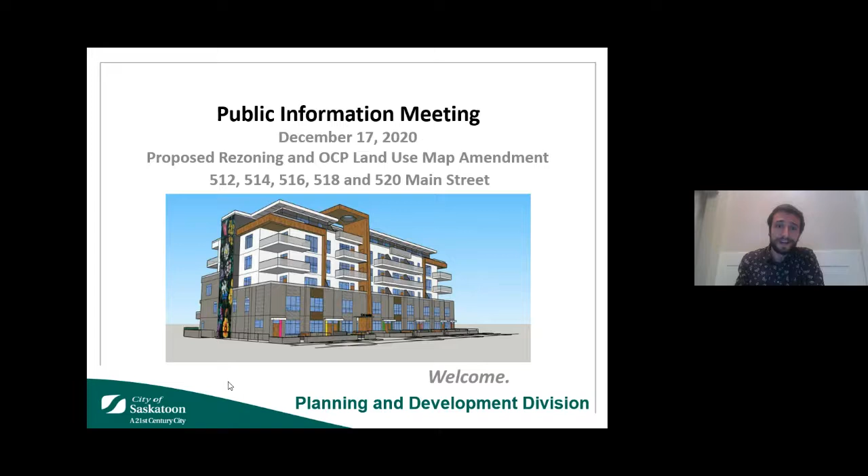Thank you, Councillor Block. Now, before continuing, I would like to briefly outline the structure of our meeting this evening. Firstly, we'll be hearing the presentation from the administration, outlining the proposed amendments and how these would function within existing policy. Following this, we'll have a presentation from the applicant, wherein they'll provide an outline of their proposed development.

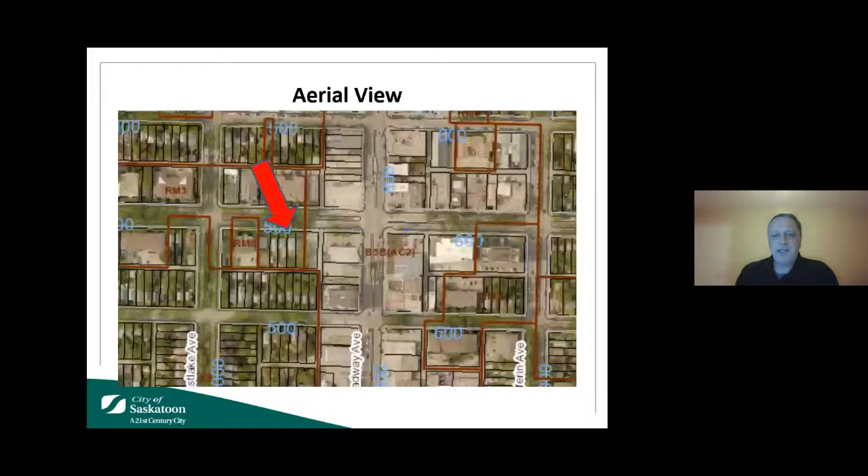The proposed rezoning to an RM5 district, subject to an agreement, will provide for development of a 6-story multiple unit dwelling on the site. The proposed development contains a mix of housing styles, including at-grade townhouses with entry onto the street, apartment-style condominiums, and a penthouse suite.

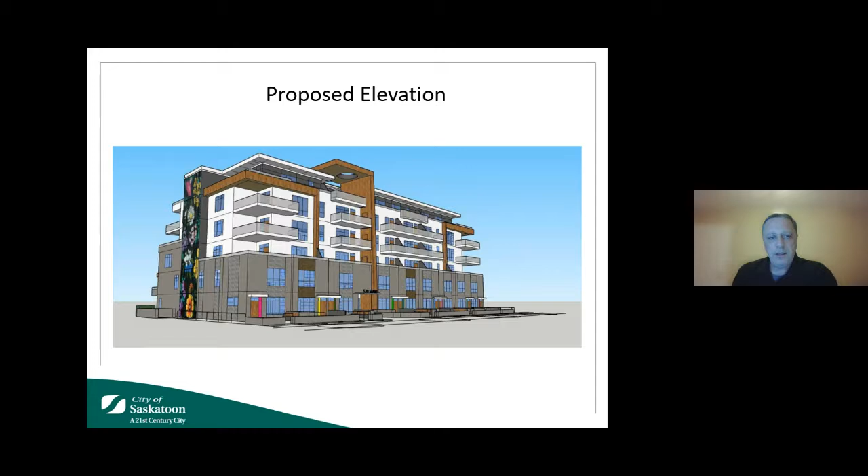The proposal provides 77 on-street or on-site parking spaces, in line with the zoning requirements for that district. 13 of those parking spaces are just off the lane, and 64 are in an enclosed structure, some at grade in garages and others in an underground parkade.

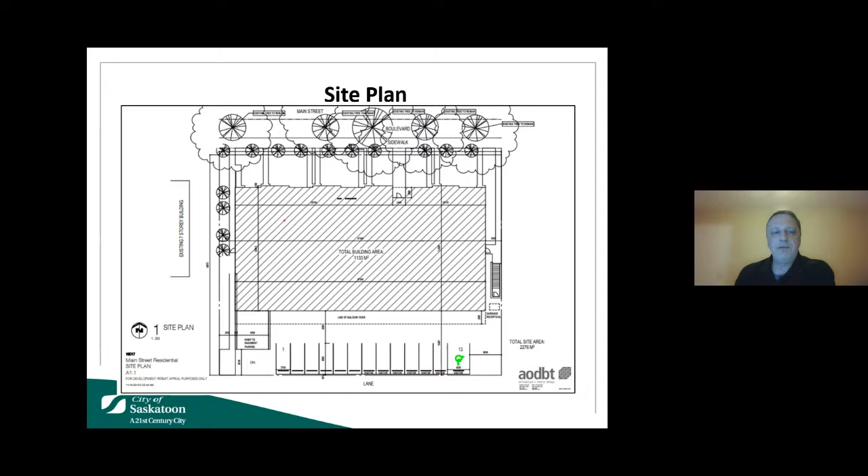There are existing boulevard trees adjacent to these properties, and the applicant will be working with the city's urban forestry group on a tree protection plan for these trees. The applicant will talk more about the building design and style in their presentation.

Now, in some instances, a regulatory tool called a zoning agreement may be used when a specific development is proposed as part of a rezoning application. A zoning agreement is a legal tool and agreement that, if approved by City Council, is tied to the land and ensures that only the specific development proposal put forward by the applicant can be constructed on that property.

So for this proposal, a zoning agreement would provide for the 6-story multiple unit dwelling. It would identify a maximum of 50 dwelling units and other site requirements, tying it to the layout and overall design you'll see tonight.

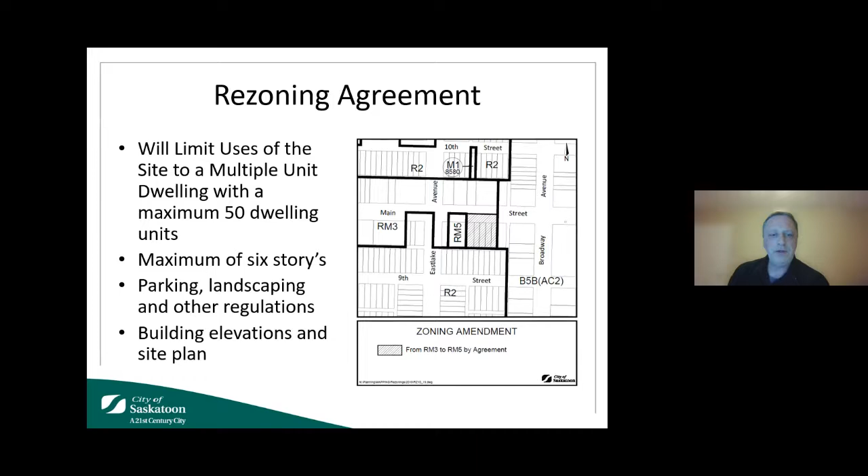To accommodate the proposed development, an amendment to the official community plan land use map will also be required to change the land use designation from medium density residential to high density residential. This high density residential designation would be the same as applied to the 7-story apartment immediately west of the site. The current land use designation and zoning would provide for a multiple unit dwelling about 3 to 4 stories in height, while the amendments would provide for the 6-story building.

Now, the intent of a high density residential land use designation is to enable the development of a range of residential building types and community uses.

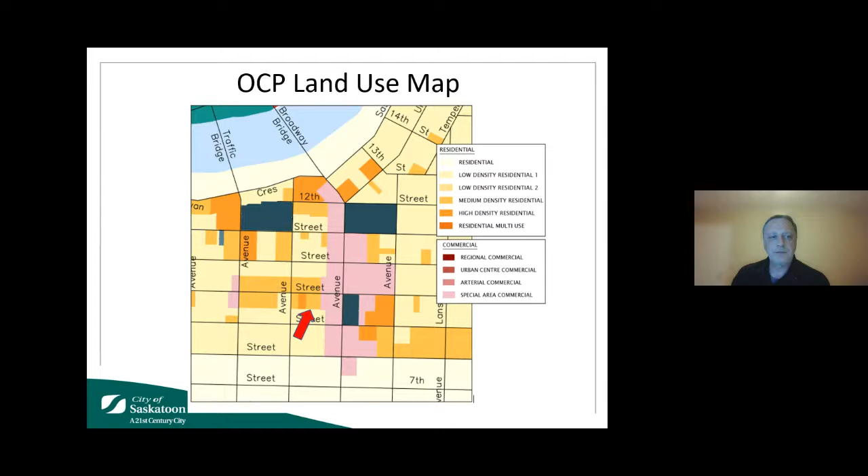There has been a local area plan done for Nutana, and in evaluating this proposal against that local area plan, there were components it did align with. It did protect and enhance housing options in the Broadway area by providing opportunities for various housing choices and for people to live in the area.

It did protect the human scale of development to promote the street orientation of commercial and residential development. You'll hear more detail about how the main floor units on this development enter right onto the street. And it reflects the historic residential character of the area by ensuring that street-oriented development.

There is also a Broadway 360 plan done for the area, which defines neighborhood character areas, including the Main Street corridor and higher density development. There was a resulting architectural overlay zoning district, but that was only applied to the commercial area of Broadway and does not include these properties.

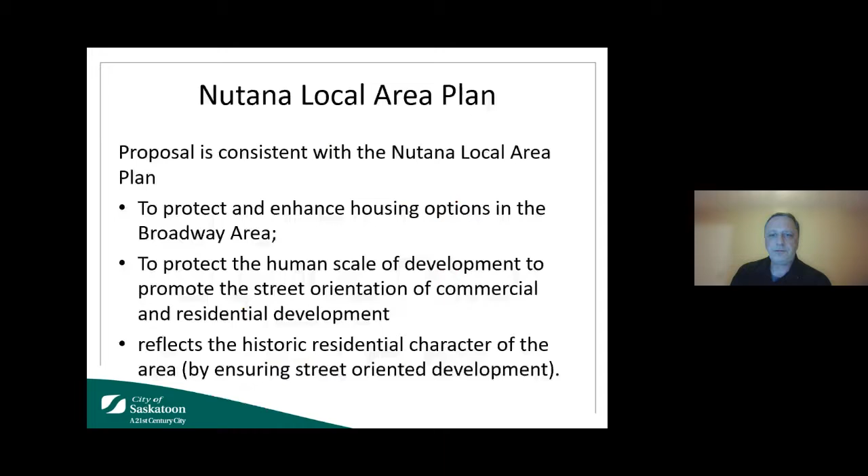For the next steps of this proposal, administration, after this public consultation is over, will evaluate the comments we hear. When we're ready to move forward, we will prepare a report to the Municipal Planning Commission, an advisory committee that will provide a recommendation on the proposal to City Council, along with administration's recommendation. Our administrative report will summarize comments from the public consultation and our technical review.

The earliest we would be able to take forward a report to the Municipal Planning Commission would be the end of January 2021.

Following Municipal Planning Commission, all applications need to be considered at a public hearing at City Council. Before that public hearing, we do place ads in the newspaper. At the public hearing, City Council will hear administration's report, consider Municipal Planning Commission's report, and hear from any members of the public that may wish to speak.

We will be updating our Engage page with those dates and to provide any timeframes for how the application will be moving forward. At this point, I'd like to turn the presentation over to Jason Hurd with AODBT to discuss further details of the proposal.

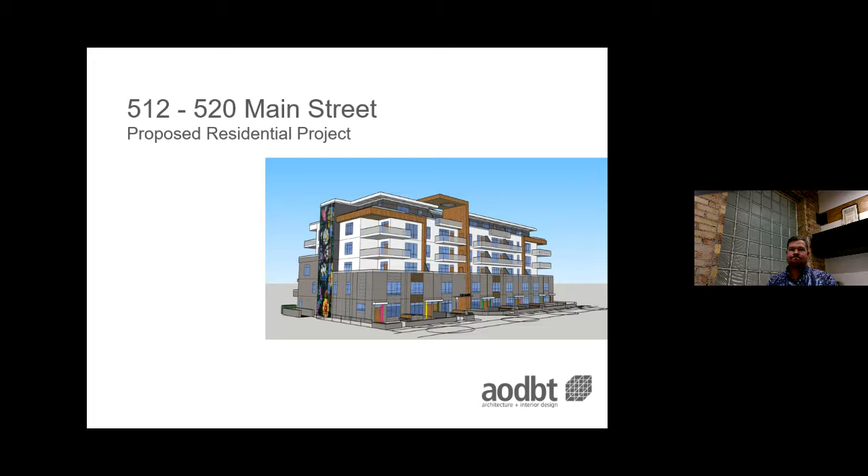Our clients, Connie and Brian Shank, have roots in Saskatoon, and because of that, they have an understanding of the special character of the Broadway neighborhood. They also have a real interest in working to enhance that neighborhood with this development. They really believe that a place with so many great amenities can only benefit from a project of this increased scale and size. Working with them, it was pretty clear.

Working with them, it was pretty clear that they had a real focus on creating a building that brought something special to the Broadway neighborhood, through a mix of different housing types contained in one building, which could cater to a number of different demographics: young professionals, working families, or even retirees looking to downsize but stay in the neighborhood.

This is the site plan. Daryl talked a little bit about this, but to reiterate, our parcel that we're developing is the hatched out portion in the center, which would represent the building. The site is bordered by Main Street along the north, Broadway to the farther east, a lane access to the immediate east, a rear lane to the south, and an existing 7-story building to the west.

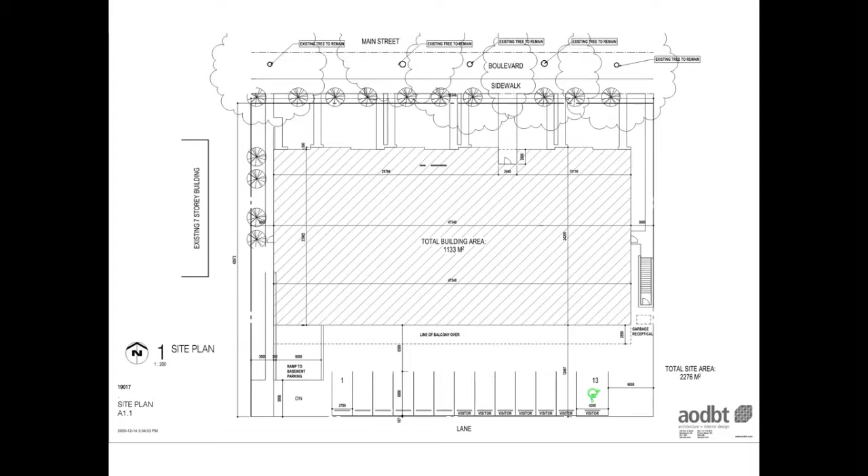Focusing a bit more on the site itself, one of the defining features is really the row of existing heritage elms along Main Street. They're really one of the most important assets of the Broadway neighborhood, and our team worked closely with urban forestry to prepare a design that would address that, providing minimal impact to those trees and maintaining them as an asset as the project was developed.

As mentioned, there is rear lane access, so that gave the project the opportunity to have a mixture of surface parking and underground parking access from the rear lane. The site plan also shows, along the north side, 2-story townhouses along the first couple levels of the project. The idea behind those was to address the street in a traditional way to help reinforce the residential character of Main Street, so you actually have traditional style front entrances and front yards along Main Street.

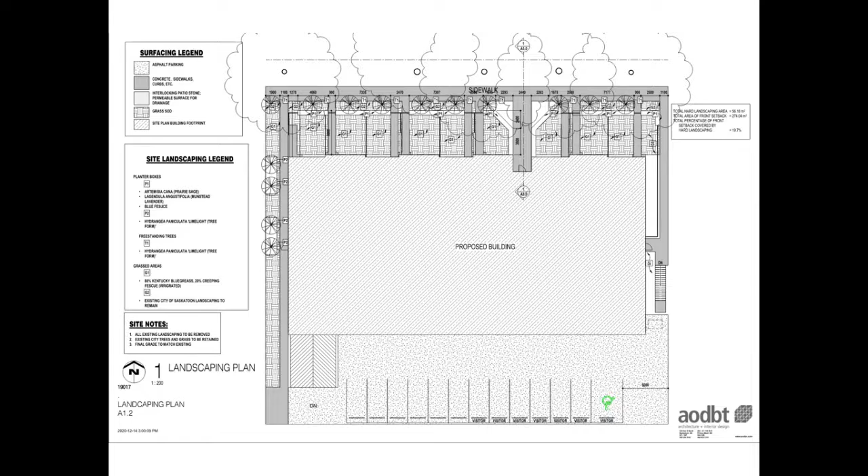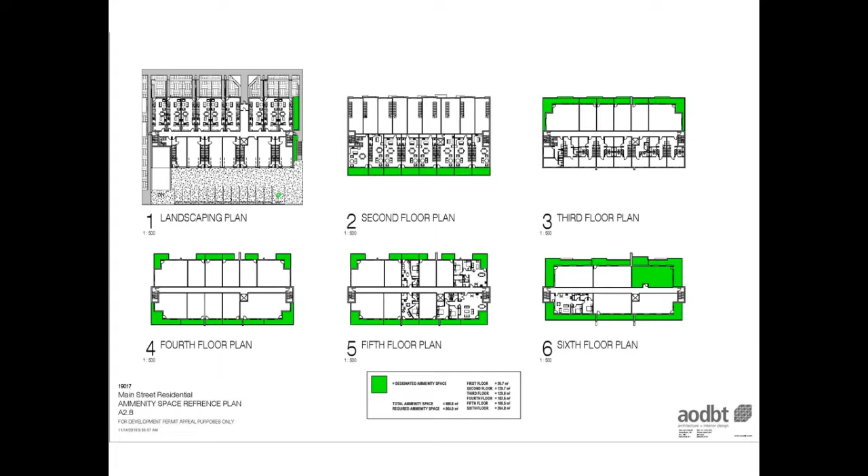The massing of the building was really designed to minimize the impact of shadows on the street. By virtue of the location of the site, which is on the south side of Main Street, there's an adjacent lane on the east side, a fairly wide boulevard along the north. Main Street's a 2-way street with a very large landscape median down the center. From our perspective, the shadow patterns will be very minimal and should have minimal effect on the neighbors.

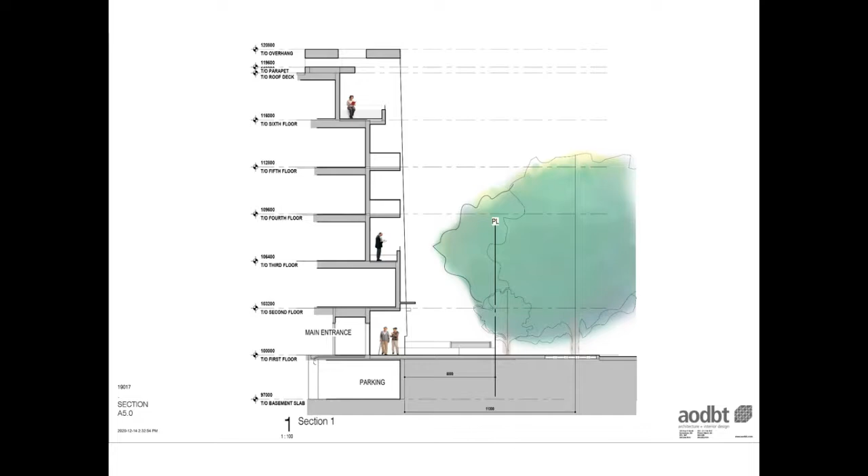We can have the next view. So the exterior design of the building is contemporary, but the townhouse units along the first 2 floors help reinforce that traditional scale and massing at the street level. You can see an indication of the front yards - a traditional front yard, front porch, front door along Main Street. The intent in terms of materials is really to use premium exterior finishes, which will ensure the quality and longevity of the building.

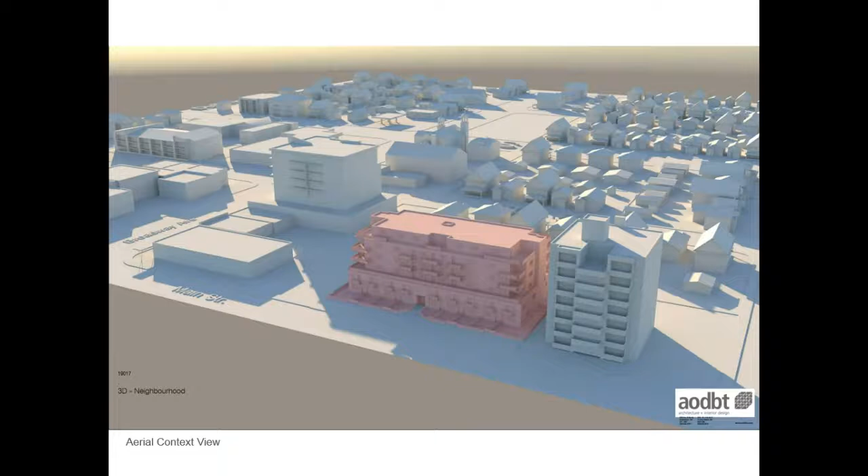I think that concludes my quick presentation on the design, but I'm happy to turn it back over to Tony for questions.

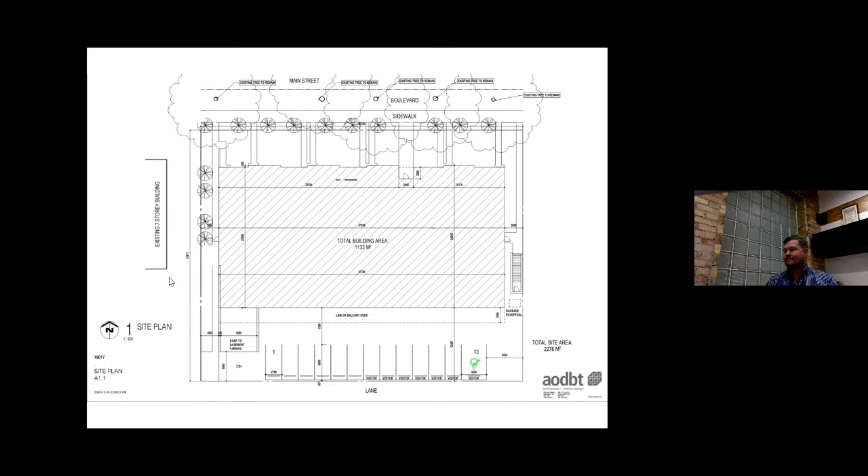Next question: just noting there are quite a few high population buildings in the area currently, either under construction or existing - including the Beto structure at the corner of Main and Broadway, which we've spoken to earlier, and the existing apartment to the west. Just some questions about what are the rules over density. Are there any development standards that regulate building density and residential density in this area? Perhaps I could get Daryl to speak to this question.

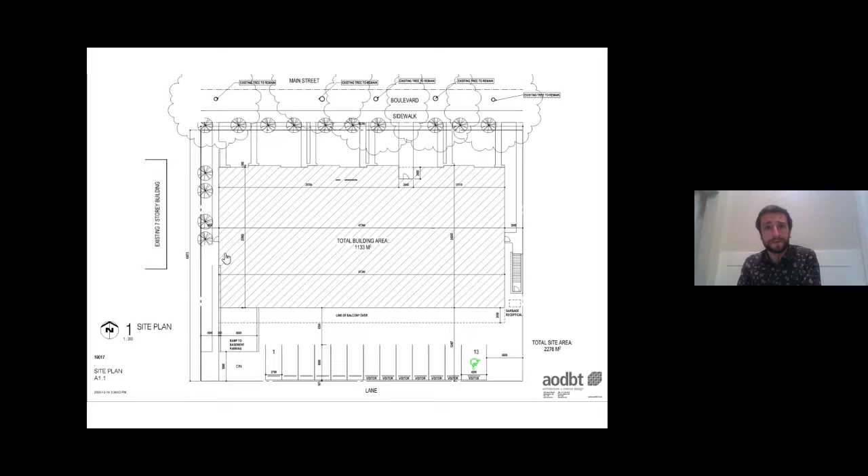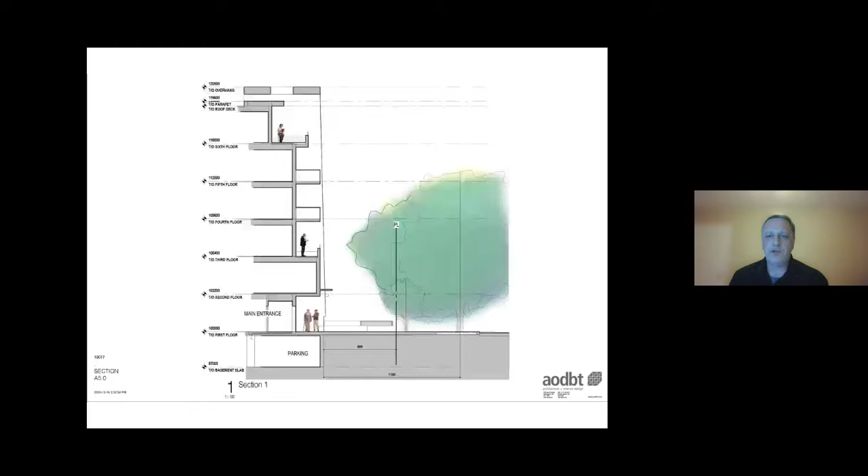All right, thank you Anthony. That's an excellent question about density within our city. There are guiding policies and documents we look to in our evaluation of how much density should be in certain areas of the city. One of the first aspects is the growth plan to 500,000 that was adopted by the city, which looks at promoting infill to ensure sustainable growth within Saskatoon. That growth plan looks at strategic growth nodes such as north downtown, university lands, but also along corridors and strategic infill opportunities. Our official community plan also describes where our density would go within our city. Looking more specifically at Broadway, the Broadway district itself provides for higher density development along that corridor or street. There are nodes that go out from Broadway, such as Main Street and other flanking streets, that do provide for some of that higher density.

So there are those policies that we do look at to ensure that development does fit the density for an area. There are other technical matters we also have to look at. We want to make sure that any development can be serviced appropriately. So part of our technical review for this proposal was to ensure that water and sewer can be provided on the site without impacting other properties. So I can advise that through our technical review, it can be met.

So that question about density, there's no cap prescribed, but what we look at is how that fits within our policies, both within the official community plan and larger policies like the growth plan. It's a great question. I hope I've answered it for you, and if you need to discuss that further, please make sure you reach out to us to discuss some more.

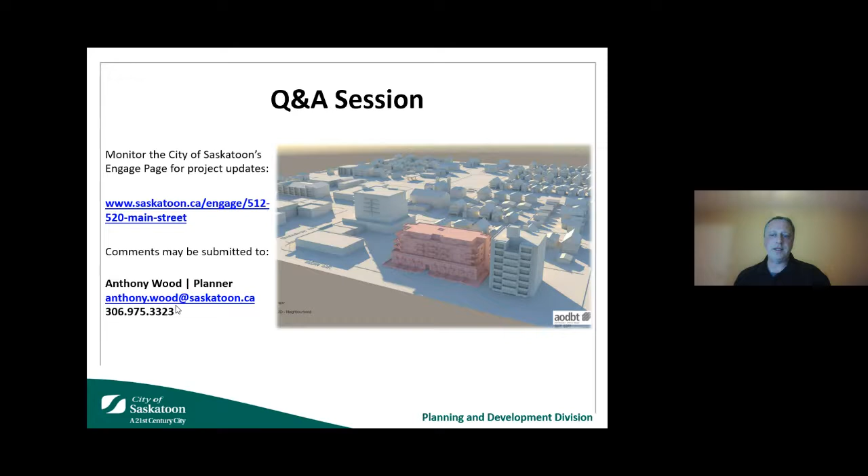That's a good question about that boulevard maintenance. Typically within the city, we look at residents or property owners being responsible for the boulevard right in front of their property. But that center median boulevard falls within the Parks Department for maintenance. So there would be an expectation of these developers, as well as anybody with the boulevard in front of their property, to take care of that, but not the expectation of that center median. If there are issues with that maintenance, while it's not our department, you can let us know and we'll pass on those concerns to the Parks Department. That's a good question about maintenance of those boulevard areas.

Agreed, thank you again for speaking to that, Daryl. Still no other questions coming in here. Councillor Block, did you have something to add to the boulevard question?

I thought it might be appropriate to let folks know that the engagement for the review of our boulevard maintenance program has just opened up, on saskatoon.ca/engage. We're interested to hear from folks about ways we can do a better job maintaining our center medians and side boulevards. I brought this motion forward at council in 2017, very early in my career as your city councillor, but it's something I see every day in our community, and something I don't see in suburban communities. Somehow we need to figure out a way to ensure the boulevards and center medians in our historic neighborhoods are keeping pace with growth and can be beautified in ways we see elsewhere in our city.

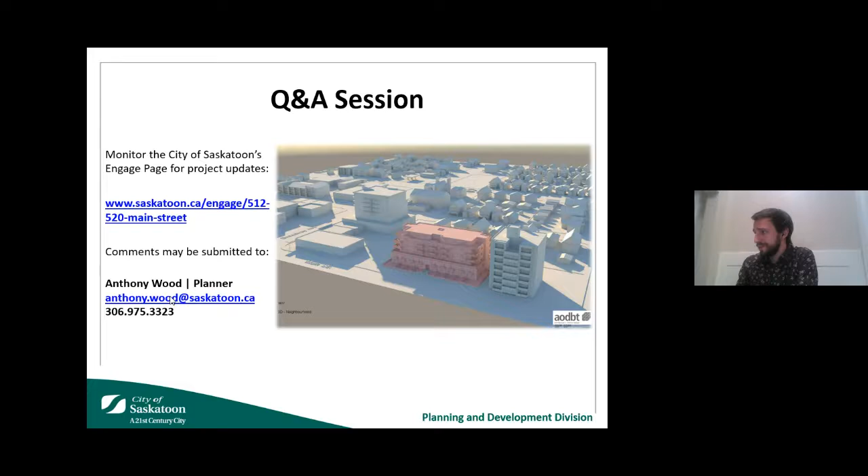We don't have any other questions coming in since the last one here, so I suppose with that, I might wrap things up. I would like to make folks aware that just because you didn't get your questions in tonight doesn't mean you can't reach out to make our office, as well as the applicant, aware of any concerns or questions. My contact is directly on this last slide here, as well as on our Engage page on the City of Saskatoon website. So for the next couple weeks, feel free to reach out. But aside from that, I think this covers off the evening. Thanks again to everybody involved - all the city staff, the applicants for attending this evening, Councillor Block for making an appearance and posing some interesting questions. I think this was a really informative public information meeting, and thank you everybody for attending, and please again feel free to reach out if you have any other questions.